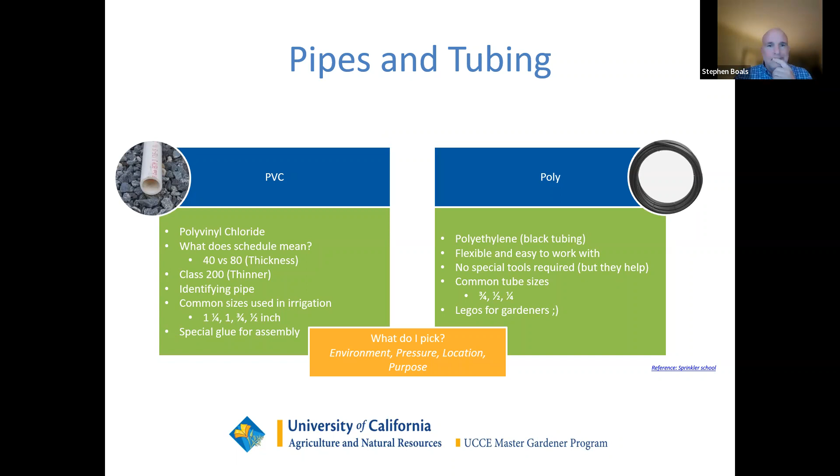Filters. Filters are often overlooked when using a domestic water supply, because a lot of folks either don't know or they assume that it's contaminant free. Why do I have to filter my water that I get from the city, right? I recommend always using a filter of some type, as calcium deposits or rust that could build up, pieces of pipe or dirt that gets into the system, can wreak havoc on your drip system. So it's a nice insurance policy.

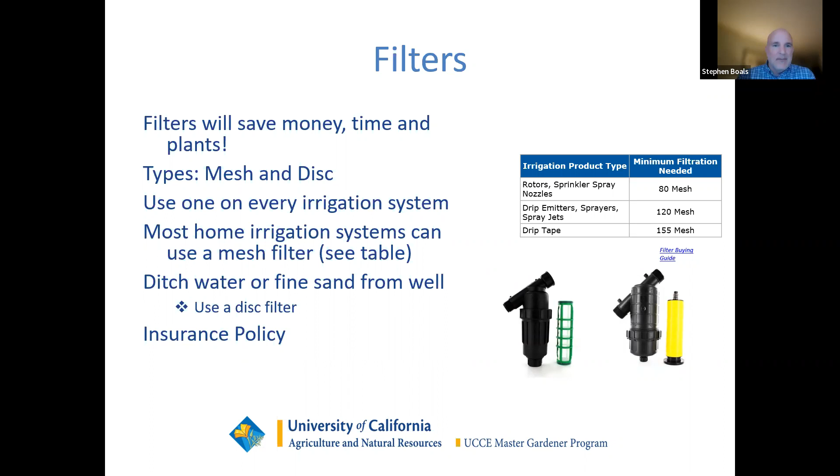So filters should be cleaned on a regular schedule, and otherwise you'll get blockage. And typically that occurs on the hottest day and your plants die. So make sure that you clean those filters on a regular schedule. So another important component that's overlooked often is a pressure regulator. So if you have a drip system, this is absolutely required. And without one, you could have a system blowout or failed components.

The typical water supply from a house is in the 50 to 60 PSI range, which is 2 to 6 times what drip components are supposed to be stressed under. So understand that the system may not pop initially. I had a friend that set up their whole drip system, so proud of himself, and a week into it, he forgot to put the regulator in. It blew while he was out of the house at work, and he ran up a pretty large water bill.

So it won't pop initially, but over time with the heat and the expansion and the cold, and especially in our environment, weak points will eventually fail, and you'll have a failure of your system. So always use one of these in your drip zones. So they're easy to install. Some of the filters that you buy now have the pressure regulation incorporated in them. I was at a couple of the big box stores, and they're making them now all in one, so you don't have to buy all these separate components.

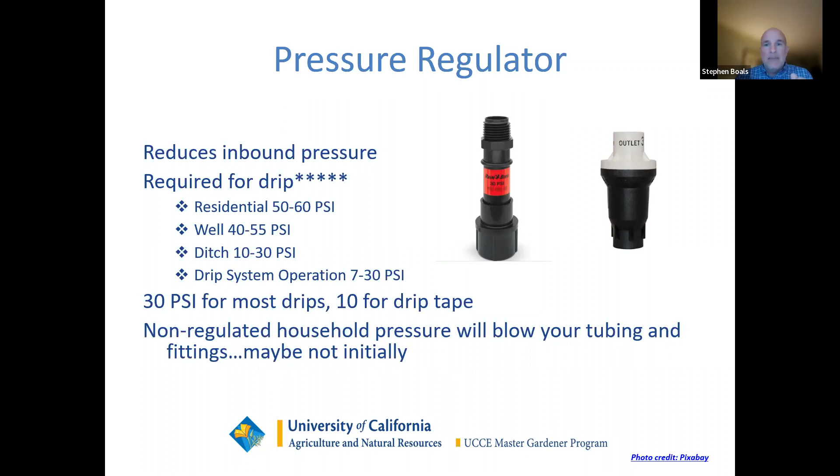And you can buy them for tubing. You can see the one on the left here goes to a hose bib, or you can buy them with pipe thread to put in your connections on your pipe in your PVC. Okay. An anti-siphon or backflow preventer. What these little guys do is they actually prevent backflow of water into your source, and your source could be your house.

So I want you to think for a minute about that soaker hose that's out in your garden, and you just applied that beautiful compost tea or that fertilizer, and that water getting sucked back into your domestic supply, into your ice maker. Probably not going to taste very good, not good for you. Maybe some health benefits, probably not though. But you should have these on all your hose bibs as well as your sprinkler line.

One note, you can see the sprinkler head here has a siphon incorporated. Typically, those are the U-shaped sprinklers, and then there's straight through ones that don't have the siphon. So you always want to make sure, especially if it's plugged into domestic supply, that you've got that siphon type of valve for your sprinklers.

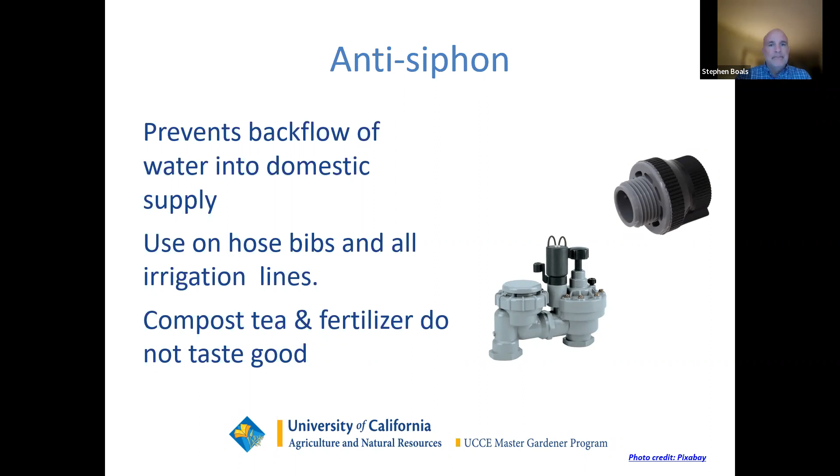Valves and timers. So for the simplest drip setup, your valve is your hose bib, and the timer is you, right? You go out and do your watering. But if you want to automate your irrigation, timers and valves can chop up your yard into different watering zones that let you control the delivery of water and automate the whole task, right?

So they can be separate components, such as valves controlled by an electrical timer, and they can plug into the electrical system. Or you can buy combined units that have a valve and a battery or solar driven timer and controller, which is really nice, especially if you live on acreage and you have some remote areas where you want to put some trees or a remote garden away from the house. And you don't want to run electrical and pipe and all that kind of stuff.

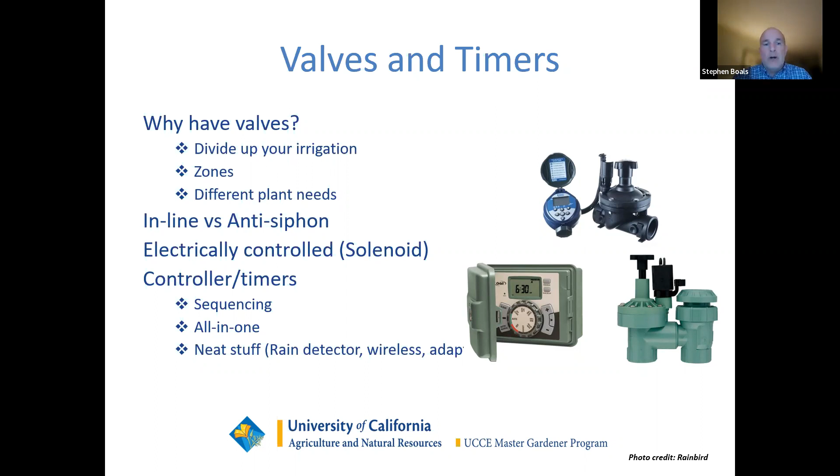These are really nice. I have one down in my lavender field that turns on and waters my lavender because it's, you know, a couple 100 feet from the house and any water. So very, very nice components today that you can use.

So sprinklers have really come a long way since I was a kid. I remember the days of brass sprinklers, and you had two choices, right? A Rain Bird impact sprinkler or those little brass spray heads that just dumped water on the sidewalk. Right? Today, there's all different types of sprinkler heads. I won't go over these. I think most of them are obvious. Everybody has some knowledge of sprinklers and the different types.

The one that I will mention are the rotary nozzle sprinklers. So these are relatively new, and they're called rotary multi-stream. Rain Bird makes them. All the other companies make them as well. They're fantastic for water conservation. So if you want to reduce your water flow by 60% and bring your bill down, you can put these in, and they're really nice because for the most part, you can slip them into your pop-up sprinkler bodies, just plug them in. They do require a little more time to soak the lawn, but they'll definitely help save you on water consumption.

Okay. If you're like me and love to go to the big home improvement stores, you're probably overwhelmed in the drip irrigation section, right? There's all types of connectors. Everything you could ever imagine, right? You've got drip heads, bubblers, sprayers, soakers, drip lines, emitter tubing, all different types of stuff. You can go really simple or you can get fancy, depending on what you want to do.

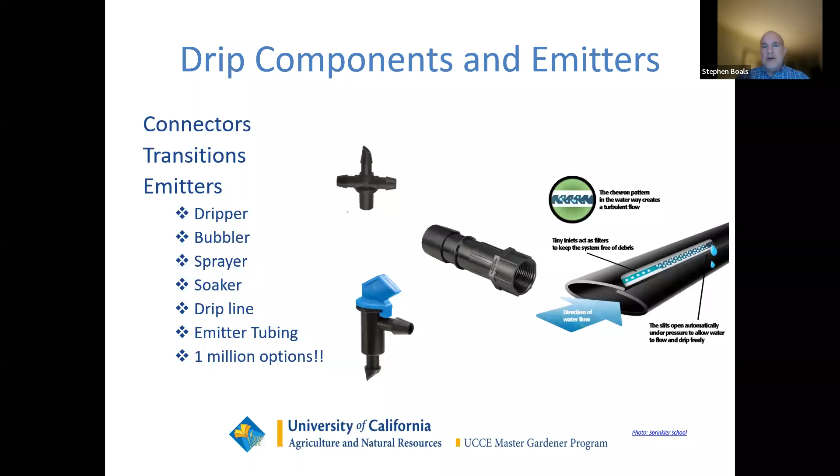And drip tape is essentially flat tape tubing that has drip emitters at specific distances. And you can buy them in 6-inch, 12-inch, 24-inch spacing. You just roll them out, plug the end, put the other end into your water supply, and you can drip. It's really nice for raised beds and also in line if you're doing row crops. They can't be beat. Really, really flexible and easy to use. And it's kind of an erector set for big kids or gardeners, right? You can take all these pieces, put it together, and build your system.

Okay. Many gardeners assume that what you see is what you get with drip irrigation, right? If you walk out after a watering, you'll see some nice big circles of water that have penetrated the soil. But note that in different soil types, there's different patterns under the soil. So the water drips and begins to spread in kind of an onion-shaped pattern under the dirt. So if you have deep-rooted crops or deep-rooted plants, you'll be able to really get some nice coverage with drip lines. If you're doing seedlings, sometimes it's a little challenging because you might miss the shallow roots. So just to give you some tips there.

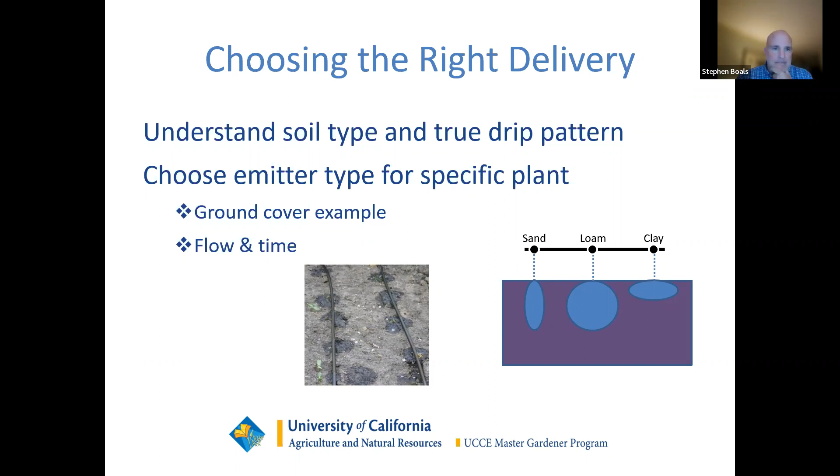Okay. So that's the end of the component section. Some really quick tips, and this is the longest section. We'll get into the other stuff real quick.

First off, the web is great for finding just about anything that you want from an irrigation perspective. Beware of Amazon and commerce sites like Alibaba. A lot of those components are absolute garbage. They won't work, they'll clog up, and they're not tested. So I definitely buy from a reputable source.

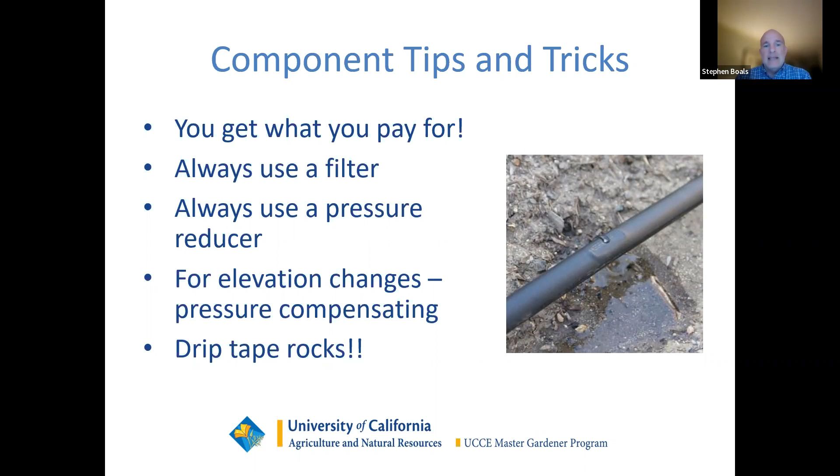Always use that filter and pressure reducer. And there's also emitters that are pressure compensating. So if you have lines that go up and down in elevation, you want to use those. Otherwise, you won't get even water distribution. And then once again, I can't talk enough about drip tape. Really handy, easy to use, and can help you get a nice big system out pretty quickly. Okay, let's move on to the planning stage.

So one of my favorite planning quotes is from Benjamin Franklin: by failing to prepare, you're preparing to fail, right? So like any other project, irrigation planning and preparation is critical. I've been guilty of it over the years. I go out and I just throw something in to make sure the plants don't die, right? Because it's getting hot. I don't do my planning and I end up getting bit and losing some plants. So take the time to plan. It'll definitely be worth it.

A couple basic considerations. Number one, know when to hire a professional, right? There's things that I won't do. I won't touch 220 electrical for pumps and things like that. I just don't want to deal with that. It's a little too risky for me. I don't want to dig trenches. I got a bad back. So kind of pick and choose. And there's contractors that'll come out and dig for you or run electrical or do the pipe. And if you just want to do the above ground stuff, you can do that.

Time saved versus time spent. I mean, right now, I'm sure as gardeners, we have a ton of stuff that we water by hand, but that doesn't work well if you go on vacation or go away during the hottest time of the year. So save that time. You can put in a nice little drip system and put it on a timer and do that. And then lastly, thinking about water saving and conservation. Obviously, with our drought, it's nice to be able to put in a system that'll take less water and put less burden on the watershed.

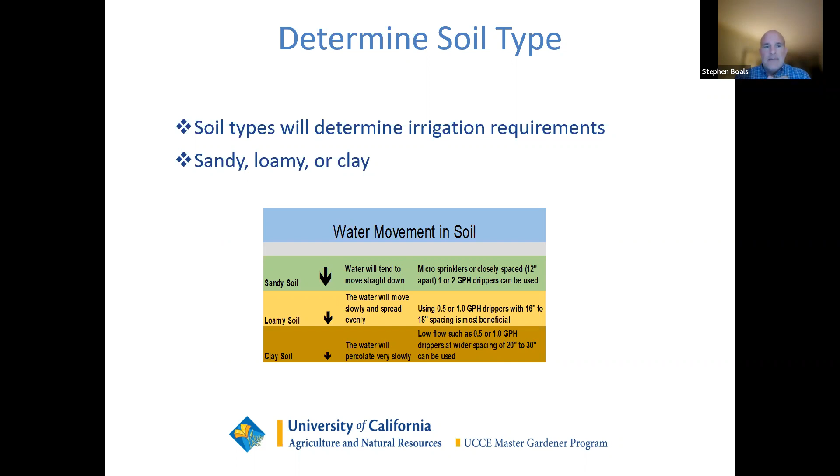Okay. We talked a little bit about this in the previous section, but one of the key planning things is to figure out what type of soil you have. And if you don't know, you can go to the Master Gardener website. There's some great methodologies to figure out your soil. For the most part, we're going to have loamy clay soil types, and a good bed is about a 1 gallon per hour flow rate to prevent runoff and get max penetration into the soil. There's some great references on your resource sheet for this, as well as on the Master Gardener website that you can use to figure out the type of watering that you need for your soil type.

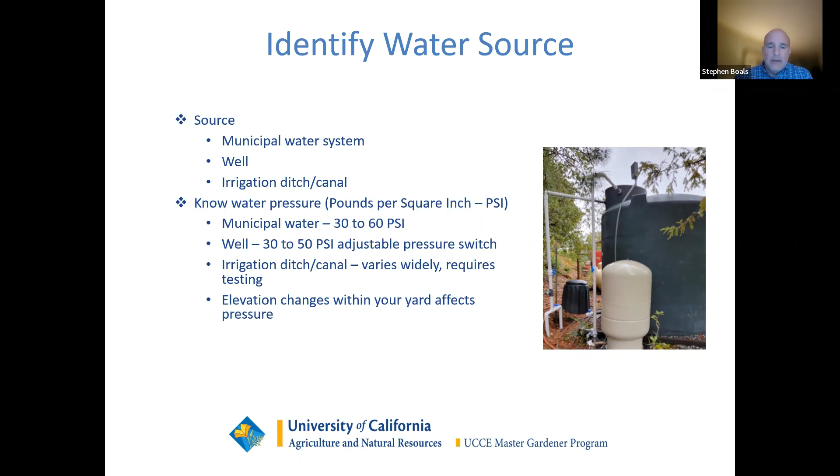So moving on to water sources. Many of us here in Placer County have multiple water sources. I know for my property, I have a well, an old hand dug irrigation well, ditch water access. So we've got different types of water sources, and the different water characteristics for those sources kind of define how you're going to plan out your system, because it determines pressure, flow rate, as well as how dirty the water is, right? So the type of filter maybe you put in, and the type of tubing that you might use. So all these different elements, something to think about when you're looking to build out an irrigation system.

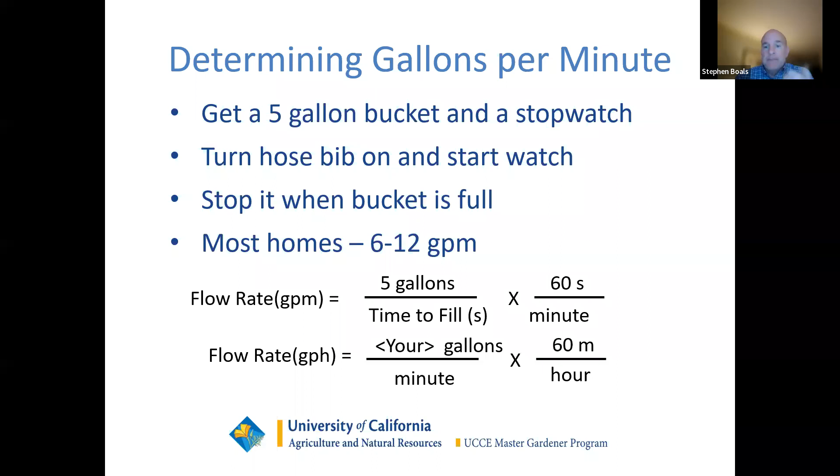These are some math slides. I know some folks are scared of math. There's a really simple test to figure out your flow rate. This might not be a big requirement for folks that are on city water, but essentially you take a 5 gallon bucket and you time how long it takes to fill. And typically that'll be a number of seconds. And then you take that, you can convert it into gallons per hour. So why is that important? I'll show you here in a second, show you how you use the info.

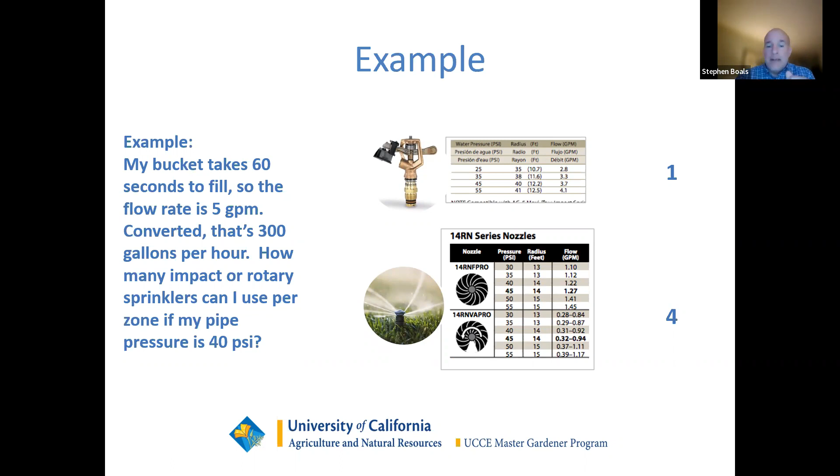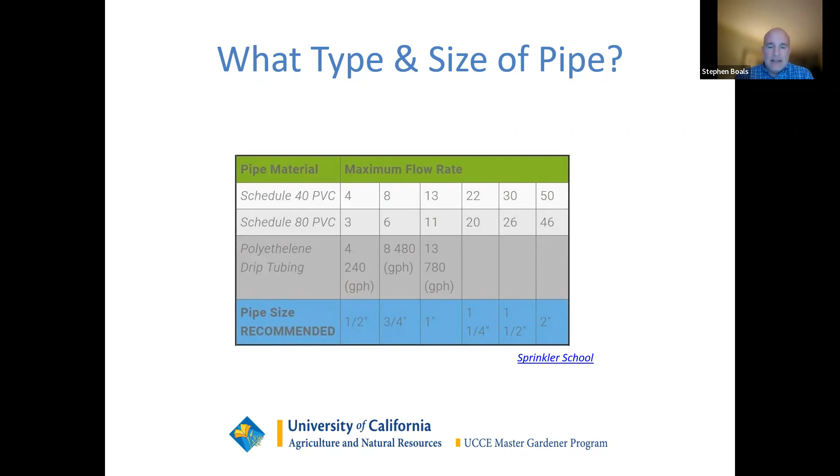Quick rules of thumb for 1/2-inch tubing. If you're doing drip, don't exceed 200 feet or 200 gallons per hour, right? Remember, you can calculate the drip rate on all the different emitters. So if you had one gallon per hour drip emitters, you could have 200 on a single 200-foot line, right? So if you're doing grapes or you wanted to do a long row of sunflowers, you could do that. And then for the smaller tubing, the really thin one, you know, I go to my mom's house, she's got like 80 different drip lines on her porch to keep all her things alive, but don't exceed 30 gallons per hour or 30 feet, okay? So these are just some rules of thumb, so you don't have to do the math. You can say, okay, I'm good for drip lines with this number of emitters and this gallon per hour.

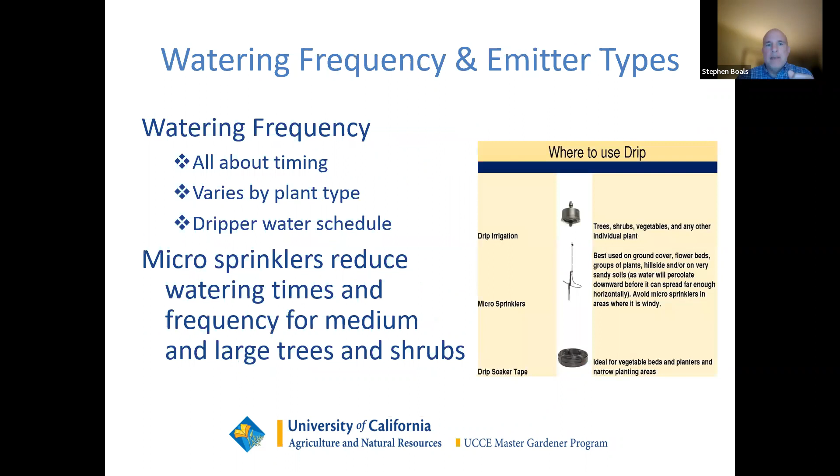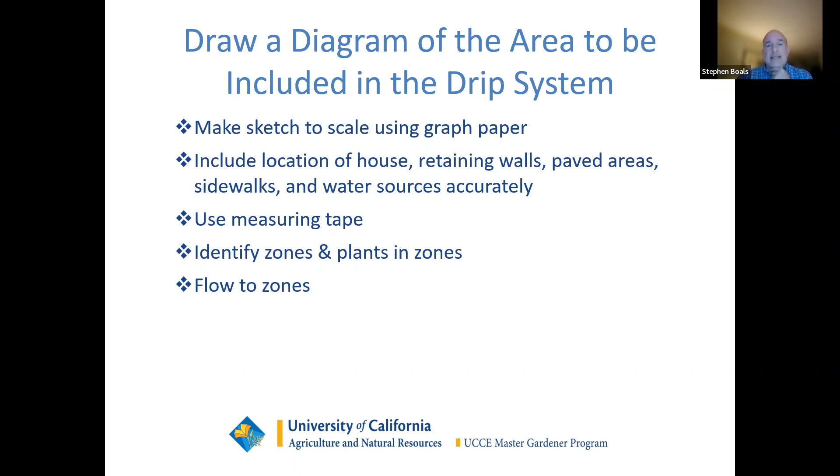One thing I recommend is to always sketch things out, right? You want to make sure that you have a plan before you go out there and start digging or start laying out your tubing. Take measurements. It'll give you an idea of how much material you need. And then the most important aspect is laying out your zones, right? You want to see how much flow you have and make sure that you can feed all the plants that are in a particular area of your yard or on your property.

Okay. So to wrap up planning, some tips and tricks. If your watering zones are any type of distance, you want to use the largest supply pipe. Don't mix emitter types in zones. So don't have sprinklers and drips. If you do that, water likes to take the path of least resistance, so it'll go to the sprinklers and your drip emitters will get the short end of the stick. I always plan for expansion. Like all gardeners, I have visions of grandeur and how I'm going to lay out all my future areas, although I can't really maintain what I have today. But always put maybe a stub of pipe or an end that you can add to down the line. And then lastly, use the charts and references out there. Once again, the sprinkler manufacturers and the big box stores have designers online that make really light work of figuring out how to plan your system.

Okay, so now the fun part. We know what we got. We've planned it out. Let's put it all together. 2 rules you should be aware of. You're going to spend a ton of time and effort putting this system in. You want to protect it, especially at higher elevations. Bury your pipe if you get hard freezes, and protect pipe that's exposed. 8 to 12 inches is a good depth. I know I've seen folks that bury it with just a little spattering of dirt, but burying it deep is good, especially if you're watering during the winter.

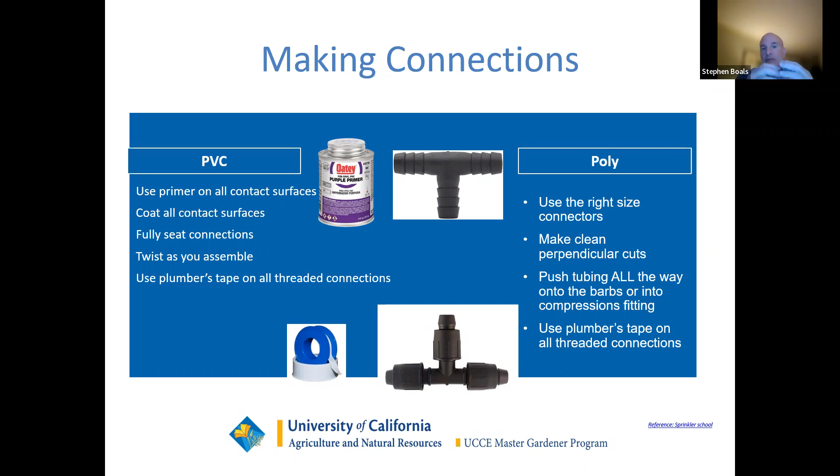The little indentations on the end there. Make sure that you push them in and that you cover all of those and pull, so it gives you a nice good seal. Okay.

To prevent leaks, make sure that all your pipe joints and threads are completely free of dirt and dry. So as mentioned, with screw down joints, make sure you use that pipe tape. Don't go cheap on the glue. If you're trying to conserve the PVC glue, you're just going to end up with a leak. Put a very good amount on the joint, seal the joint, and then clean it with a rag so that you don't get that excess on the outside of the pipe.

And then you want to make sure and inspect your work. After 15 minutes, you can go ahead and pressure test it and put water into the pipe, and then perform all your tests before you bury the pipe. That's a good one to remember. Otherwise, you could have an unwanted drip system under the dirt.

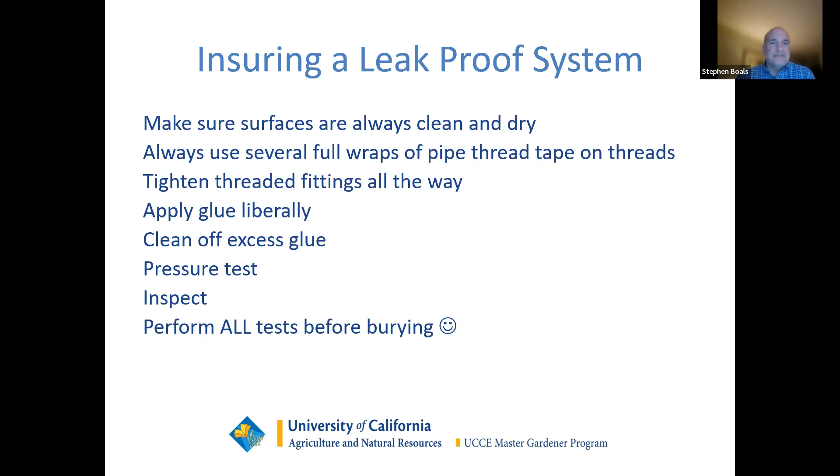So some tips and tricks. If you're doing PVC work, I always find it nice to take a big square of cardboard to bring out to put it underneath as a work surface for me in the dirt, so I don't get dirt and grass and stuff like that on the pipe and get it dirty, which will create issues. So once again, that's just a nice little work surface.

Wear gloves. As careful as I've been and as much PVC as I've put together, if you don't use gloves, you're going to have purple hands and glue all over, and it's really hard to get off. In fact, usually it takes a couple of days unless you use some type of solvent. So definitely wear gloves for that work.

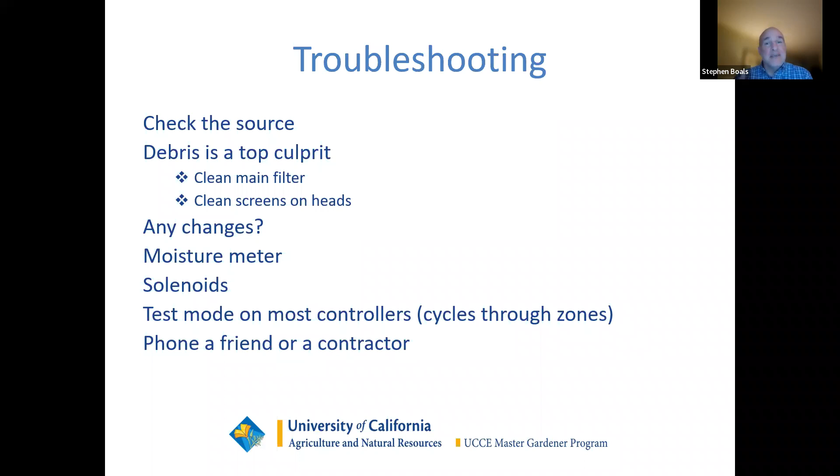Some quick maintenance. We talked about filter cleaning. Those flag drippers are really nice because you can actually pull out the flag and flush them, and they catch any of the debris. Run that zone test, especially in the warmer months, a couple times to make sure that everything's performing well. There's nothing worse than walking out after that really hot day and seeing, for me, one of my hydrangeas is dead because one of the emitters got clogged, right?

Flush the system at least once a season, and then also clean the heads of algae. So if you're running ditch water, I get algae clogs. I've got like frogs in some of my lines in my filters. You get all kinds of strange stuff. So clean your filters, clean your heads, especially if you're using ditch water, because you can get algae buildup and other types of things that'll slow down your water flow.

In fact, Rain Bird and some of the other ones have big, thick manual PDFs that you can download, 500 pages. Once again, more than you'd ever want to know about irrigation. But if you want to read up, there's some great sources out there. Okay, and then you can always go to the Master Gardener website under our resources and have all kinds of good information.